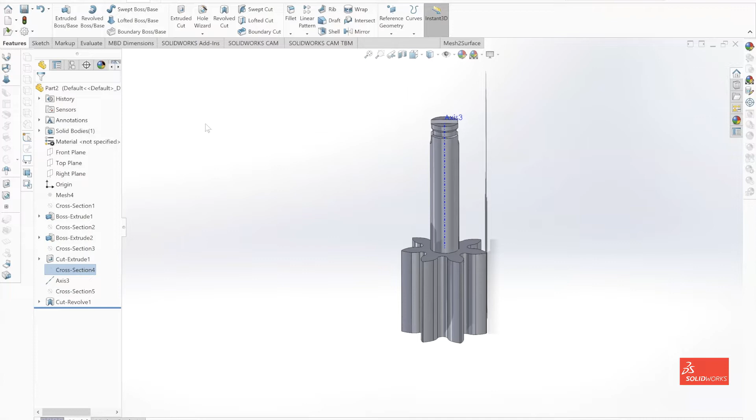So we'll start this by creating an assembly, starting with our gear and shaft here. Then we'll go ahead and import our pump housing as well. And now we can go ahead and begin our assembly of these two components.

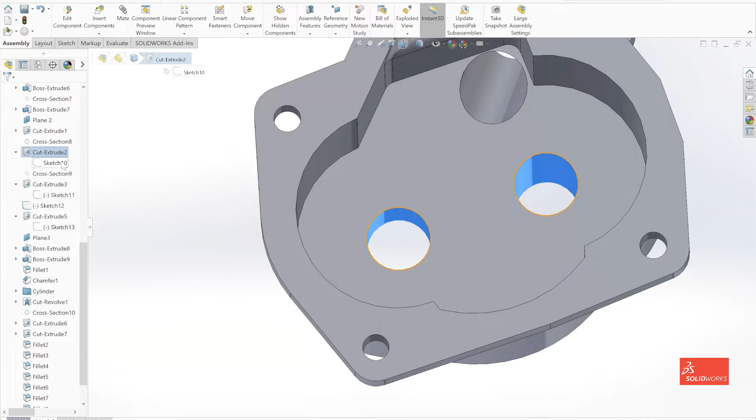The first thing we're going to do is adjust the hole diameters inside of our housing, because we know from the shaft diameter of our gear and shaft component that we're going to want to change those values to 1/2 of an inch.

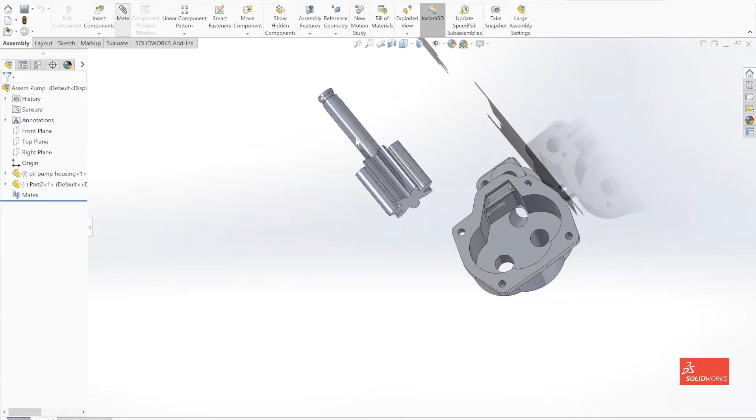With those values adjusted, now we can go ahead and mate the gear and shaft to the housing itself, making the hole location and the shaft concentric to one another. We'll go ahead and reverse the alignment of the mates, and now we have our gear and shaft properly oriented into this pump housing.

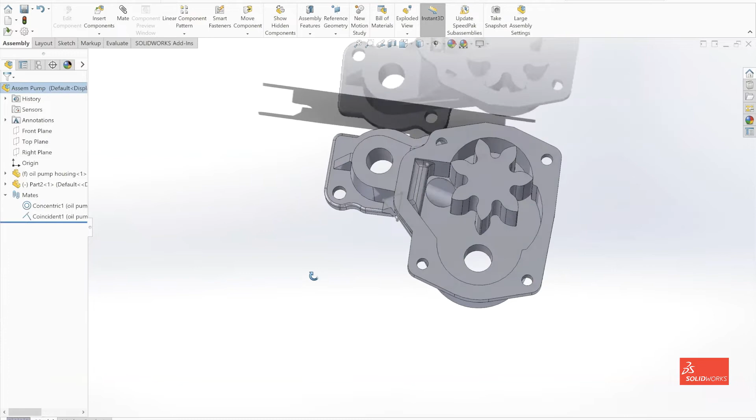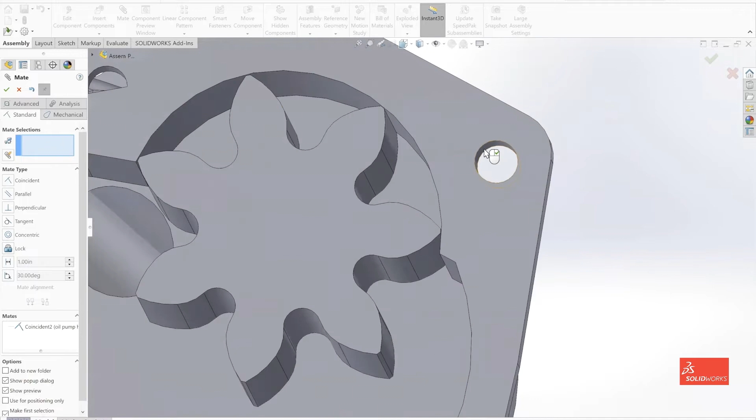Next, we'll go ahead and add another part, so we'll pick the pump cover for now. We'll go ahead and mate the bottom surface of that cover to the top surface of our housing, making those parallel to one another and coincident.

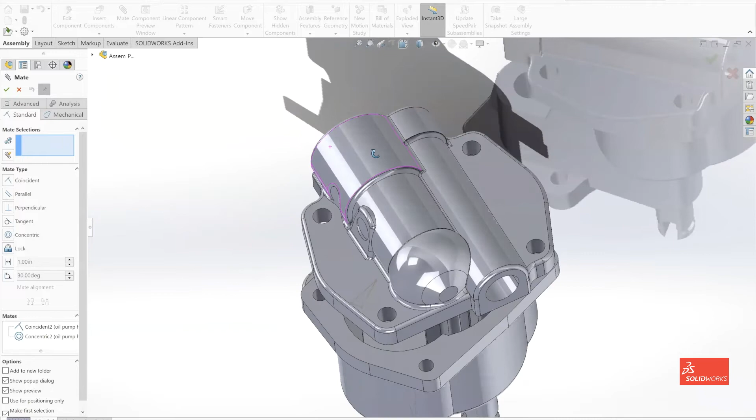And from here, we can go ahead and start lining up our bolt holes. We'll notice that we can make one hole concentric. However, because we have not done our final measurements for where these holes are going to be, the alignment does not allow us to line up these bolt holes properly. So in order to do that, we need to refine exactly where these bolt hole locations are in the two individual components.

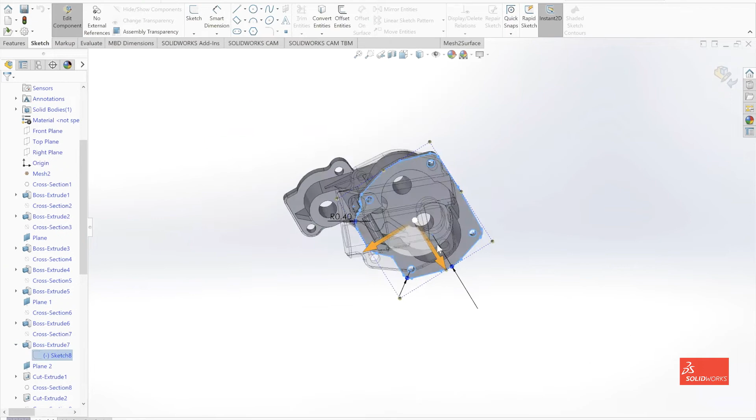We'll start with the pump housing itself. We'll edit this component and open up the original sketch that has these hole locations inside of it. From here, we'll use our Smart Dimension tool to dimension out exactly where the length and width of these holes should be, also making them perpendicular and parallel to one another.

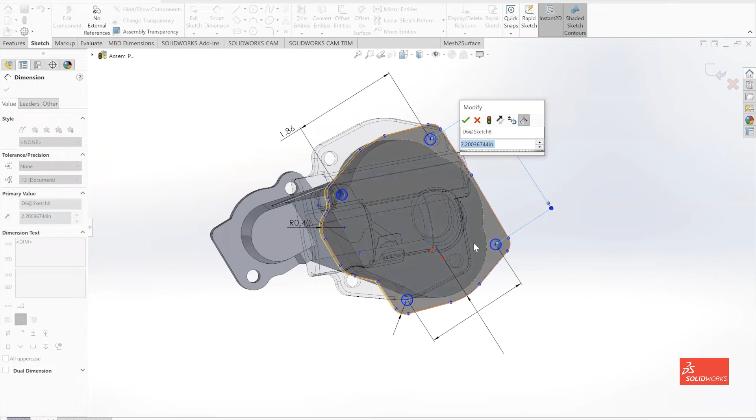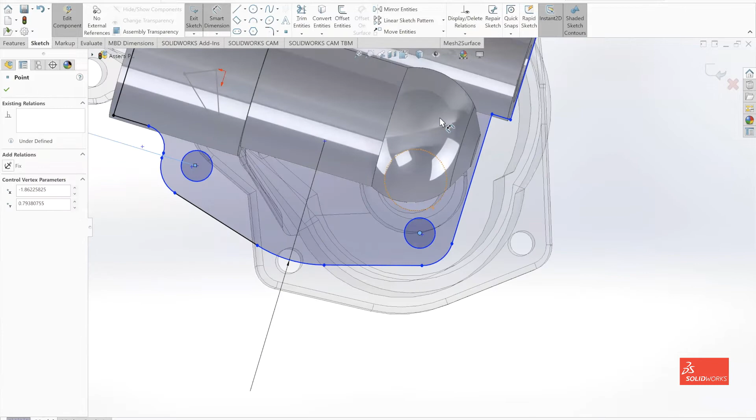Now that we have the pump housing hole locations finalized, we can repeat the same process on the pump cover. Again, we'll use those same dimensions, 2.20 for the length and 1.86 for the width of our holes. We'll make sure those holes are again parallel to one another as well as perpendicular, and then we can move back to our assembly and align our housing to our cover.

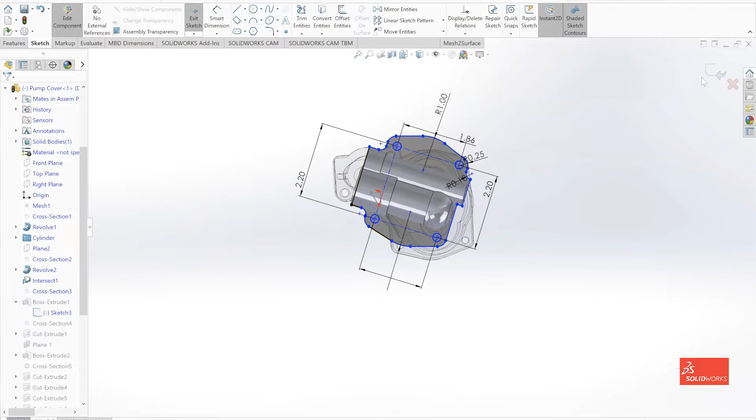So trying to do this mate one more time, we'll go ahead and see if we can make those two hole locations concentric, and we can. So now we have the cover properly aligned to the oil pump housing.

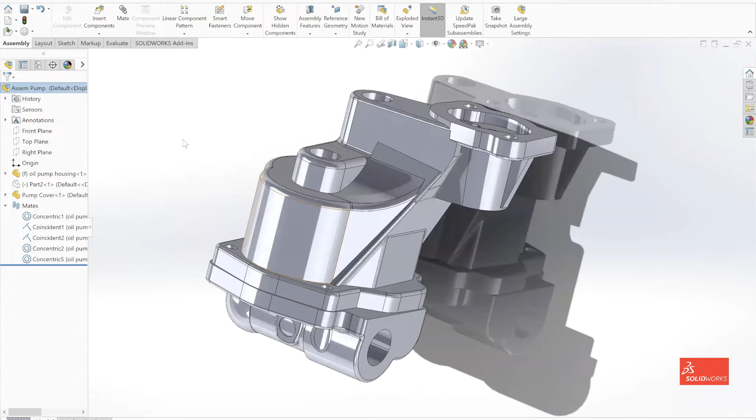And from here, we can go ahead and move on to adding our additional components. We'll start with adding the additional gear that we need, and we're just going to build that off of our original gear and shaft assembly. To do this, we'll simply remove the shaft from this gear.

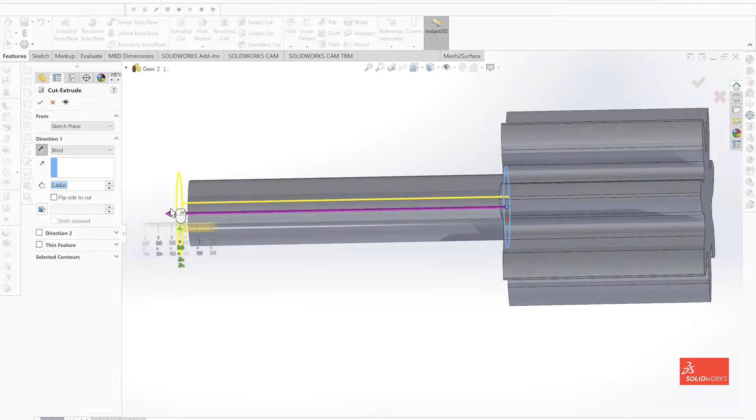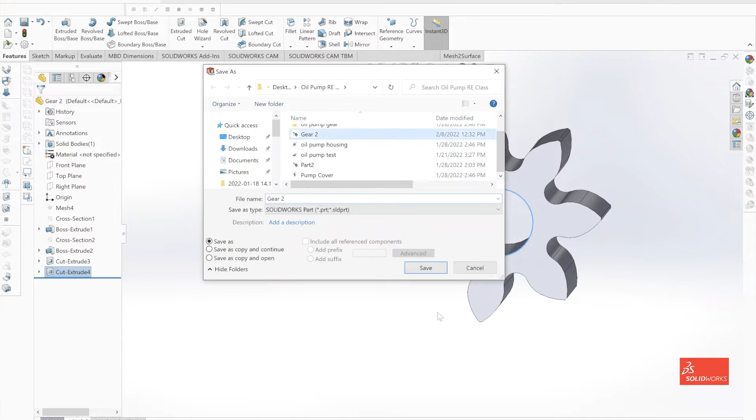To remove that shaft, all we'll do is create a circle on the top surface of our part and go ahead and do a cut extrude to get rid of that. Now we'll go ahead and add a hole in the center of the gear. We're going to make that a 1/2 inch hole for the inside of this gear shaft. We may change that later on, but for now we'll get started with a 1/2 inch diameter hole in the center of the part, and we can go ahead and save that off.

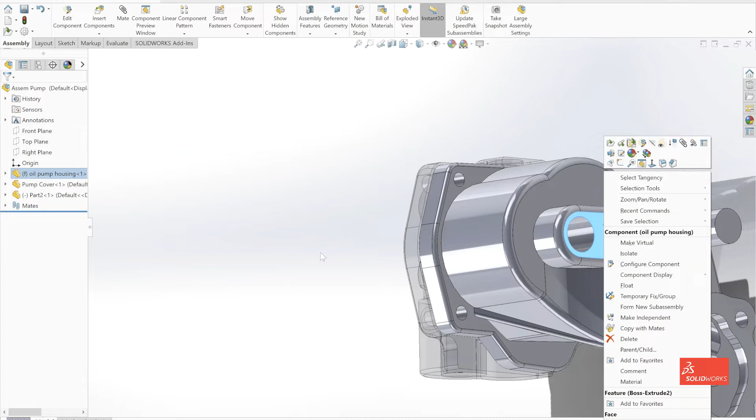Then we'll move back to our assembly and determine what we need to build next. So the next thing we're going to want to do is give that gear a shaft to sit on. To do that, we need to gather a few pieces of information from our pump housing itself.

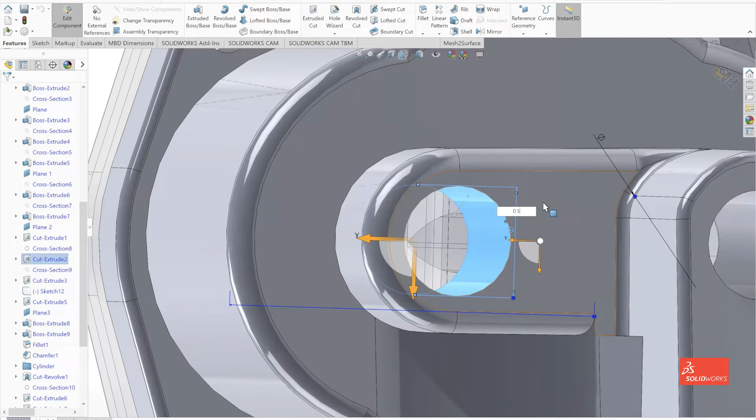We'll need to build a shaft that has a specific diameter, and we'll determine that diameter by looking at our original sketch on the pump housing. We can see our original diameter was 1/2 inch that we changed to this pump housing, and we'll go ahead and use that 1/2 inch diameter for this hole location for now. We'll just build a 1/2 inch shaft by sketching a hole and smart dimensioning that out to 0.5 inches.

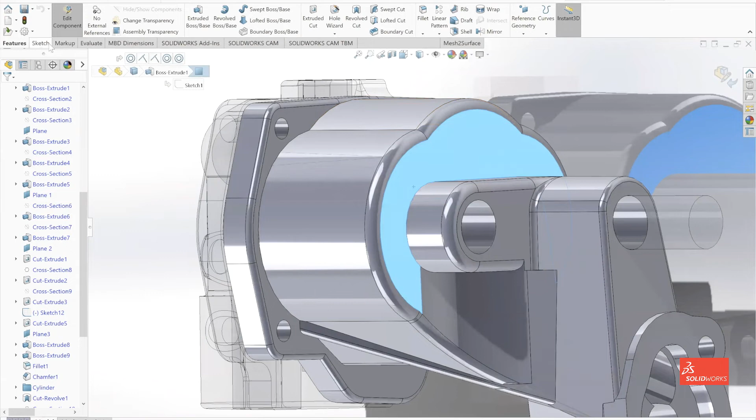Now we need to figure out what the shaft length is going to be. To figure out the shaft length, we'll just use some of our measurement tools inside of SolidWorks. We'll measure from the bottom surface to the top surface of our housing where the shaft is going to be located, and we can see we've got a value of 2.16 inches for that distance.

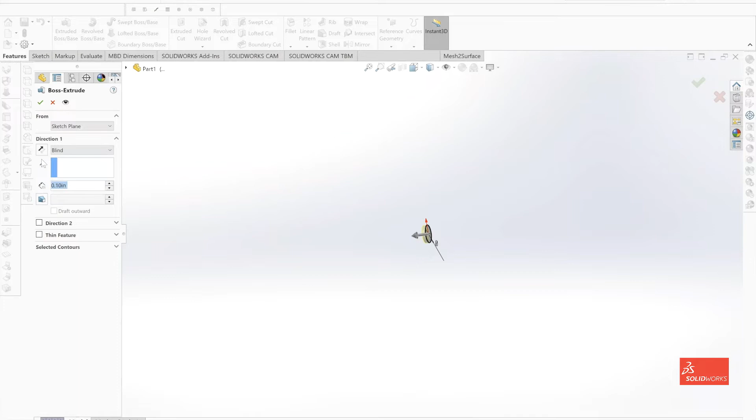So we'll go ahead and make the shaft length 2.15 inches for the extrusion to give a little bit of clearance. And now we have that shaft built out as a component. So we'll go back to our assembly and we'll import our gear shaft as well as the second gear.

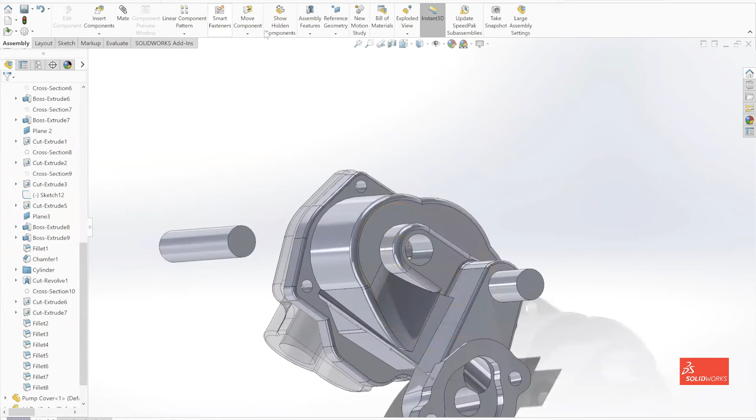We'll put the shaft into position, again making those components concentric to one another, and then make those two faces coincident so that the shaft is pulled down to the proper position.

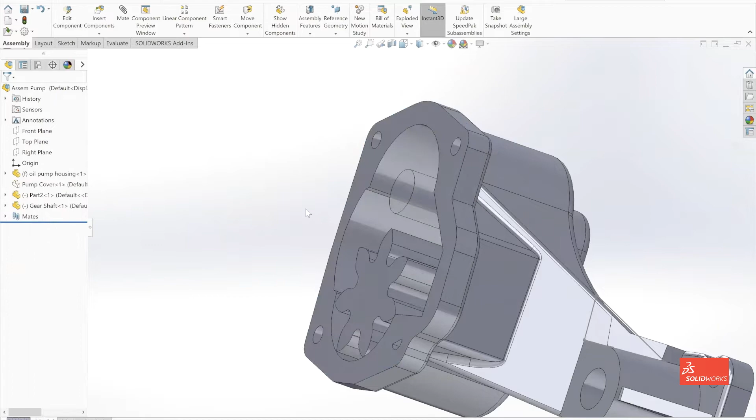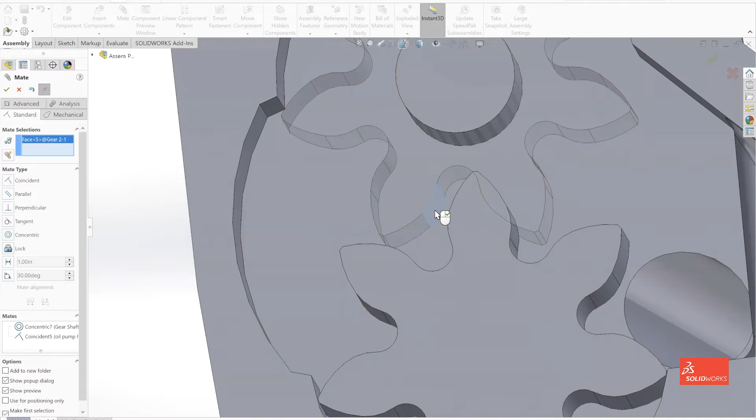Now that the shaft is in place, we can bring in our second gear. We'll insert that component, go back to our mates, and make those two components concentric to one another. We'll move that gear up into the housing, coincident with the bottom face, and then make those two lobes of the gears tangent to one another, so now it's indexed correctly and looks nice in our model.

At this point, we have the main portion of all of the components here in our part, so we're going to do a little bit of final cleanup.

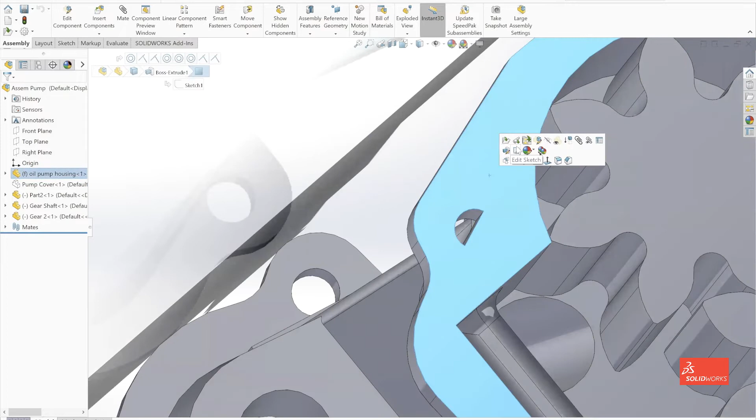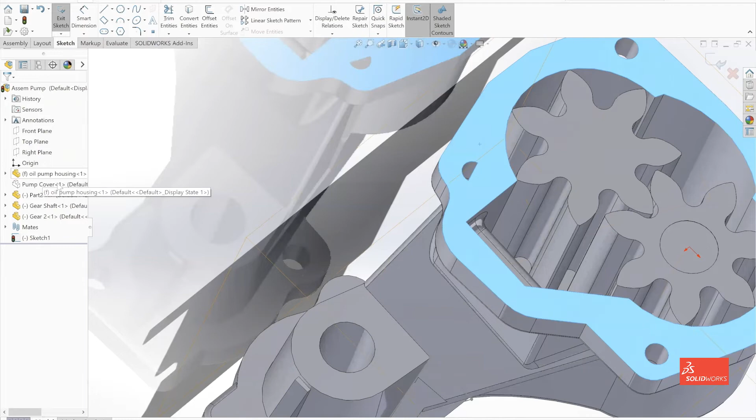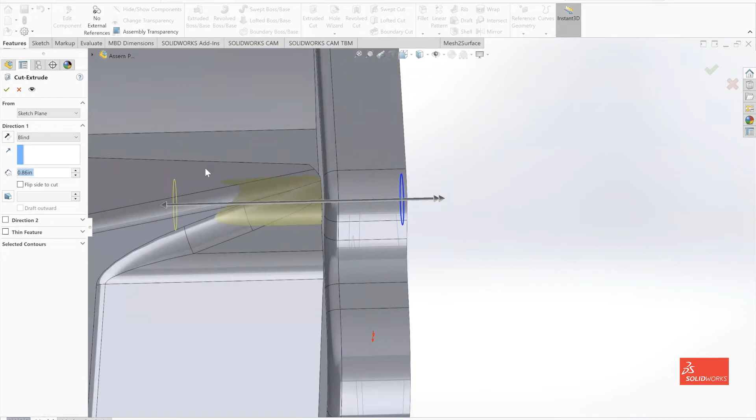We can see one of our hole locations on the housing was partially covered through one of our modeling processes when we were building out the housing. So we'll quickly put another sketched circle on top of our housing, and we can use that in two ways. First, we need to recreate this hole. Second, in this housing, this hole location needs to actually be an extruded cut slightly down into the body. So we'll rotate this over, determine how far down we want to extrude that cut, pick a location that doesn't interfere too far into our body, and have that final hole created right where we need it to be.

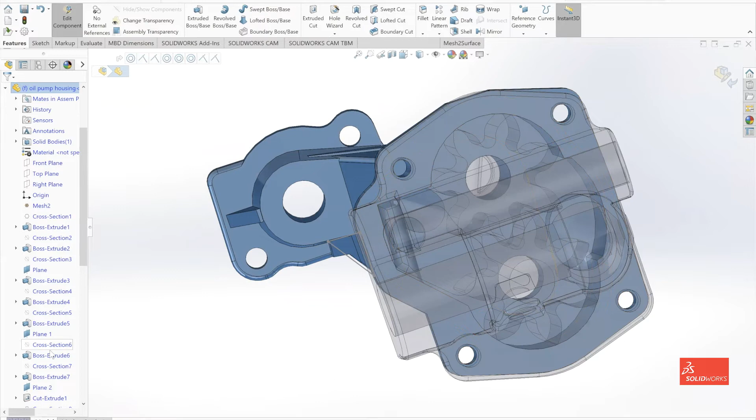At this point, we have pretty much everything done. We'll do a couple final cleanups, maybe add a few more fillets to our part. Additionally, we'll make sure that all of our hole diameters are identical and matching on our housing as well as our cover.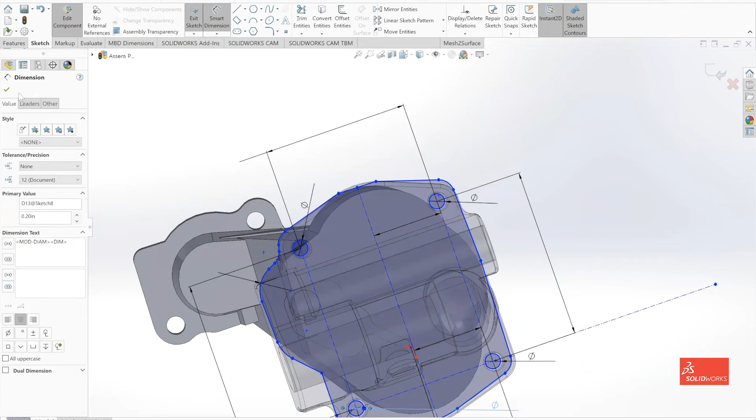And because they are two different diameters, we'll make sure the housing has one set hole diameter, and the cover has one that's slightly larger to accommodate bolts going into those positions.

We can see here we're pulling out an exploded view of our part, taking a look at the individual components.

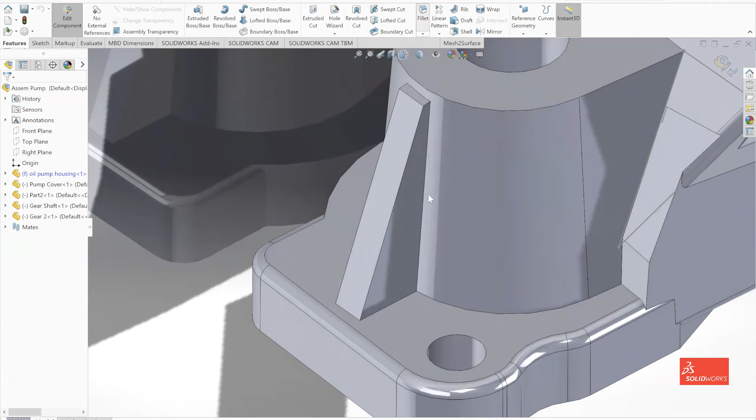Now we'll go in and add this final fillet, which we'll do as the last portion of cleanup for this assembly.

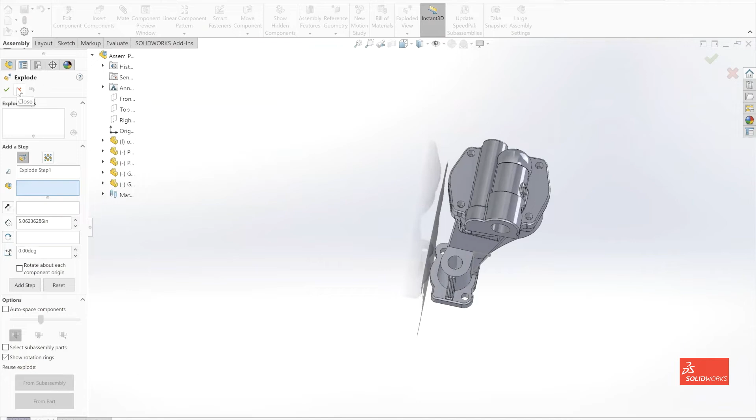Now that we've got that portion cleaned up, we'll look at our part here in this exploded view, and then bring it back into shape as the part is, and look at a few of these individual components.

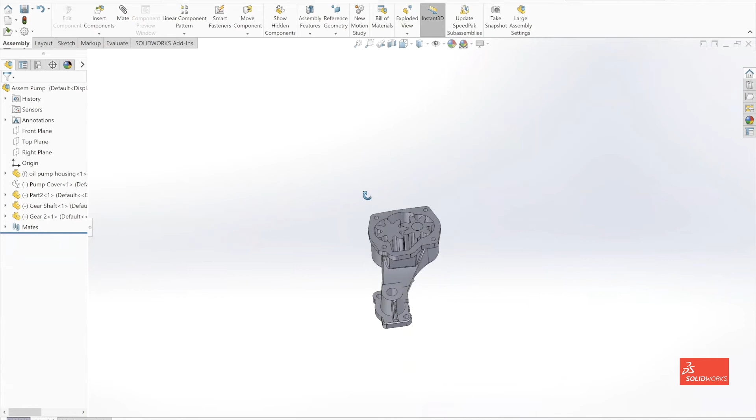We'll hide off the cover and look inside to see our gears sitting there. We can look at that small gap we have for the diameter of that gear shaft versus the housing, so we're happy with all of that.

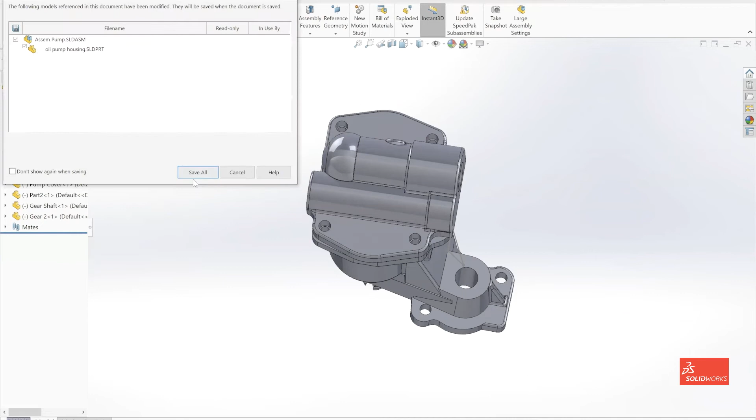At this point, we have our entire assembly completed and ready to go. The last thing we'll do with our full assembly is a quick comparison of this part in relationship to a scan of the entire pump housing.

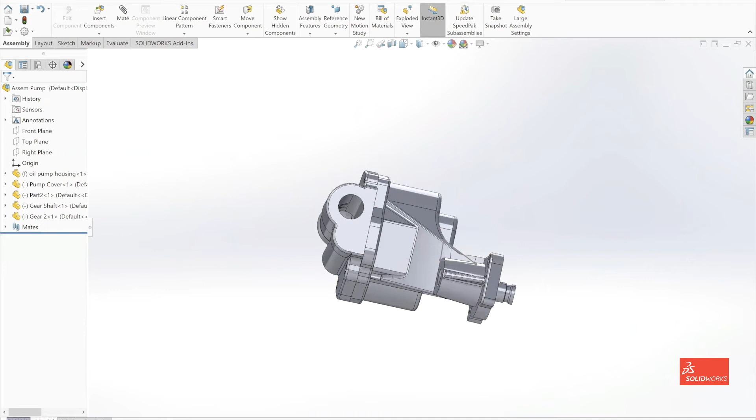So we have two different ways we can look at our parts. We can look at them individually, with the individual scans that are inside of our part files, or we can take this entire assembly, bring it out as a model, and compare that back to an entire scanned assembly of our pump itself.

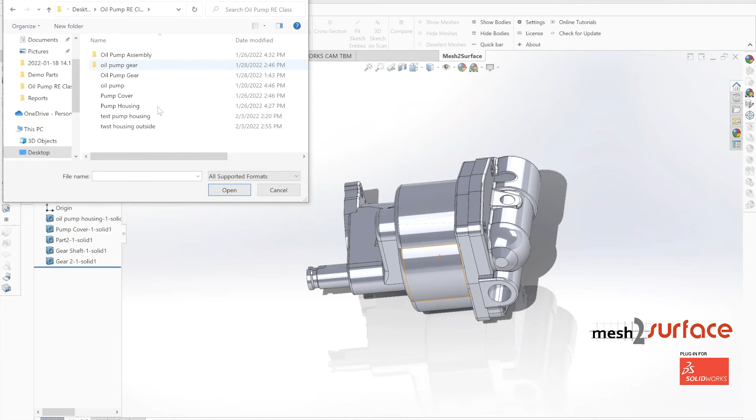So we'll bring this into another part file and import our full scan of the oil pump. Then we'll do a quick comparison to get a color map of these two parts and see how they deviate from one another.

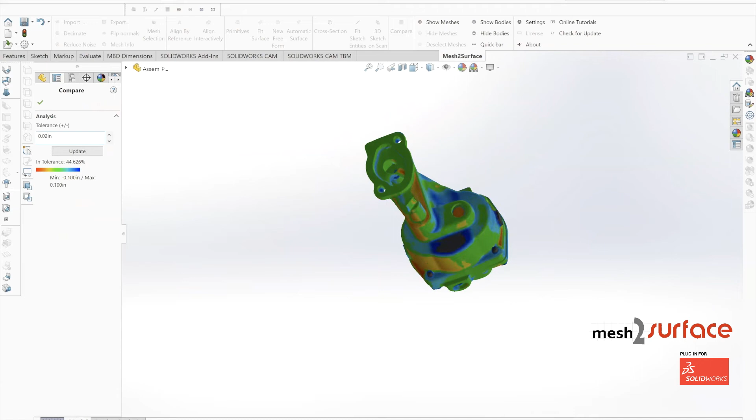Looking at our part, we can see a few different high spots and low spots that we can determine whether or not we want to add back in. We can also see how our part compares to the scan file in overall length and width.

Now we're pretty happy with the way that our part looks, so we'll go ahead and finalize this off. And if we need to make any changes at any point, we can.

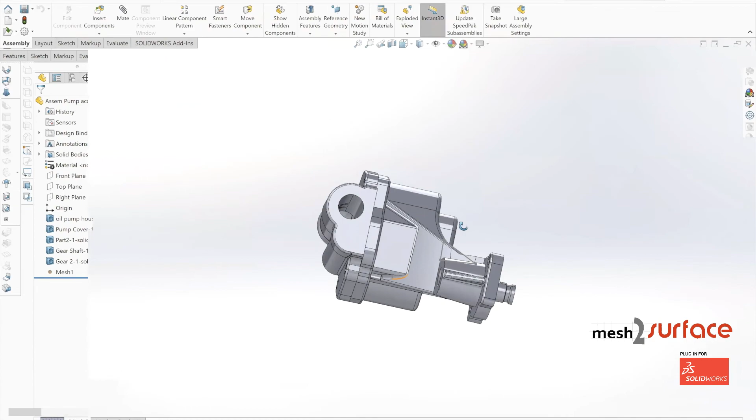In conclusion, you can see that even a part like this, which has some relatively complex shapes as well as some more simplistic mechanical components inside of it, is pretty simple to reverse engineer once we break down the process, look at the core aspects of that part that are essential to us, and then simply start whittling away at the pieces.

When I do this, I really like to take the essential parts first and get all of that aligned accurately as we need it to be. Then, past that, start taking care of the easy, basic shapes of the part and whittling it away until we have the exact object that we need as our component.

Then we can start building out those components into an assembly. And once that assembly is put in place, we can start refining the part further and further, really driving down where our bolt hole locations are and how all of our various aspects and features of the parts relate to one another.

Additionally, you can see that while we did relatively complete scans for the majority of these components, as we saw in the gear shaft portion of this video series, you don't really need the entire part to be able to reverse engineer it accurately. As long as you have the key features, the axis for that part for instance, and some of the core features that need to be replicated, we're able to pretty quickly and efficiently build out a component like that.